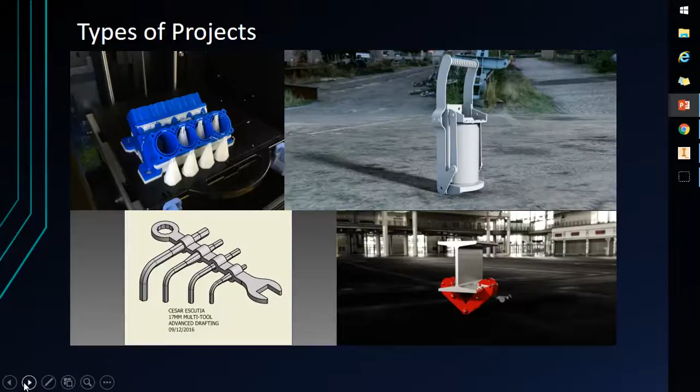I'm Cesar Escutia from Mr. Quest's Advanced Drafting class, and I partook in various projects involving both multi-part machines and simple ones, such as an engine, a can crusher, an I-beam clamp, or in this case, a tool for the wheel therapy club here at Central.

We were approached by Mr. Lundgren in order to make it, and it took sketching both Allen wrenches and a normal wrench you see here. Brainstorming was taken to combine the two parts, and the solution I came up with was to put cavities in the actual wrench that would aid in assembling the bikes in order to insert the Allen wrenches.

As it turns out, the tool was inferior to other projects done by other students in the class, and therefore was not 3D printed as planned. Instead it was 3D printed by Tyler Harrison, who made an objectively superior part.

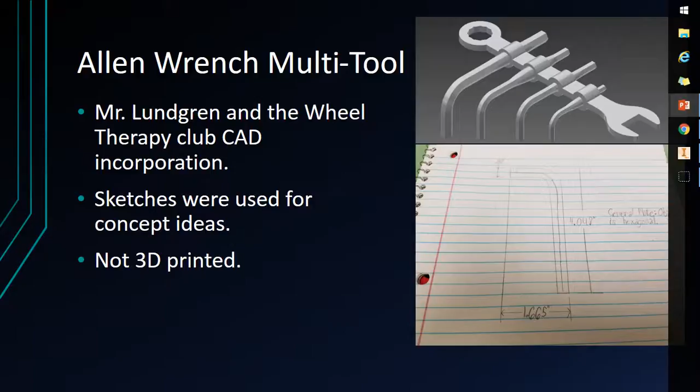Before settling on another project, I decided to partake in a few smaller projects, such as this chair part. One of the chairs in our class actually broke, and instead of ordering a new part or even a new chair, I decided to sketch out the broken one and recreate it in Inventor after sketching it on paper and transferring it.

As it turns out, this was the first model of the chair part. These ribs here turned out to be too thick, and it would not fit inside the chair. While this was a mistake, the nature of engineering ensures that this can be fixed and improved upon, so I made the ribs thinner, and now the chair works perfectly.

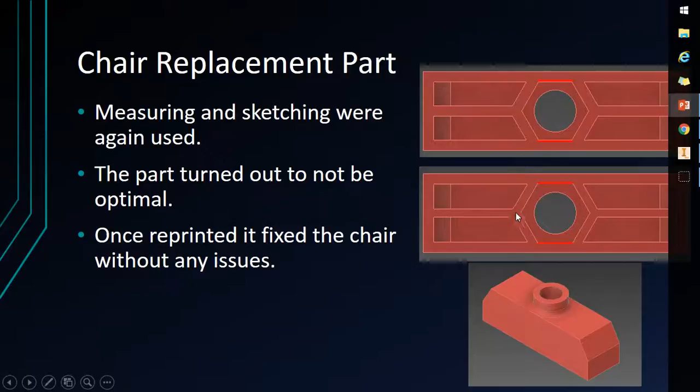The second small project was a logo asked to be made for the Rotary International Association for a doghouse that they were going to donate. This part was simple enough that I didn't need to sketch it, and instead I just traced off a picture I found on the internet.

It was 3D printed, and you can see it now on that doghouse.

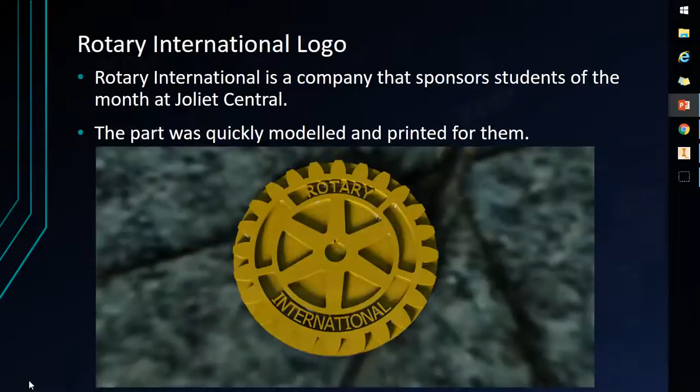The fourth and main project of the entire semester was a V8 engine block made from plans on the internet. With the level of detail that some of the parts needed, it would have been convoluted to make it out of pencil and paper. It was therefore omitted, and in its place, extra research of the engine in general, along with the pistons, so that every function of the engine could be understood, and I would know if I were making any mistakes while modeling.

The modeling of the engine took several weeks, of which about half were spent just on the cylinders alone because of how much detail went into them. Not much trouble was experienced with the rest of the parts, which led to the assembly, and the engine was finished. This, however, is not its best in the state that Inventor leaves it, so it was put into Autodesk Showcase and rendered so that every shadow and detail of the model could be shown off.

Yet again, I wasn't satisfied once this was done, and decided to modify the original V8 engine so that it would not be so small and would be usable in a 3D printer. The V8 engine received modifications on the cylinders, along with the crankshaft and the carter, so it would be able to be printed and be better suited as a showing model of what the 3D printer can do. This is supposed to make the engine able to be 3D printed and be a superior display model.

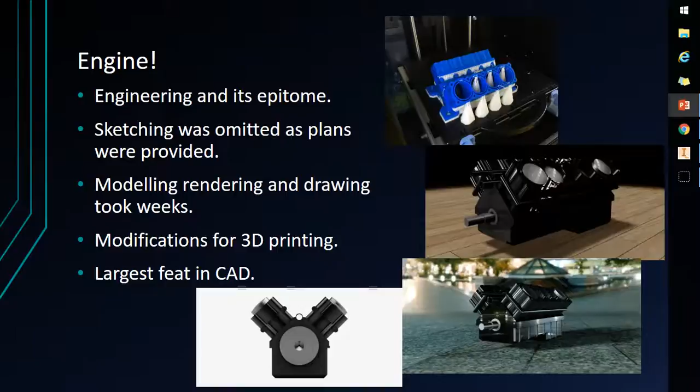By far my biggest accomplishment in CAD. You can see the actual assemblies in CAD, and here you can see the 3D printed engine that I designed.

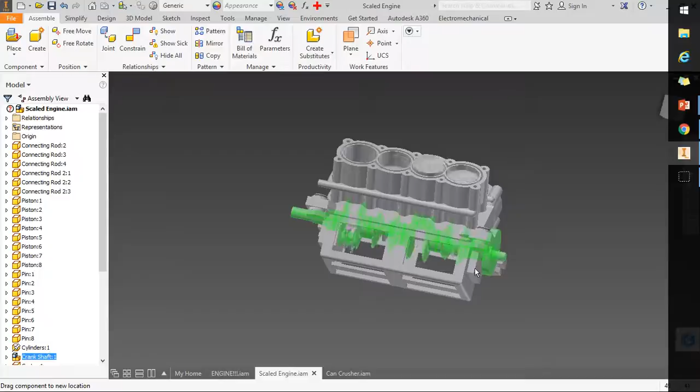Before the semester ended, I wanted to revisit an assembly that I worked on in the 2016 regional drafting competition, the can crusher. The project was small and fairly insignificant, however it was a good transition to the practice I'd need as the 2017 drafting competition drew closer.

The competition rules and environment were mimicked, especially the time aspect, which is the most important part, and this indicated that I was finishing the assemblies in two-thirds of the allowed time, slightly over an hour when I would have an hour and a half.

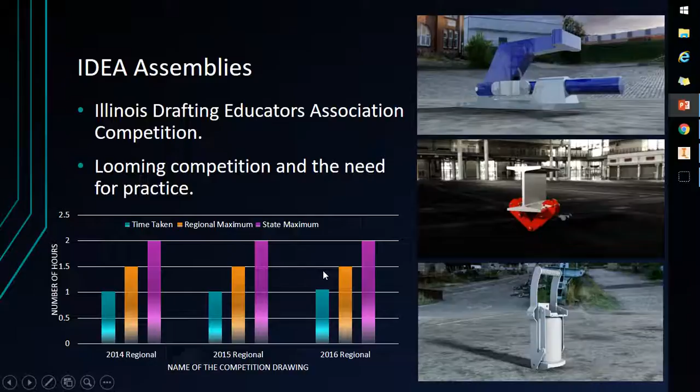Along with the can crusher, I also made an I-beam clamp, which you can see here. This was from the 2015 regional, and you can see I finished it again slightly over an hour, along with this table vise, which again took slightly over an hour, which is a good projection for me going into the 2017 state drafting competition.